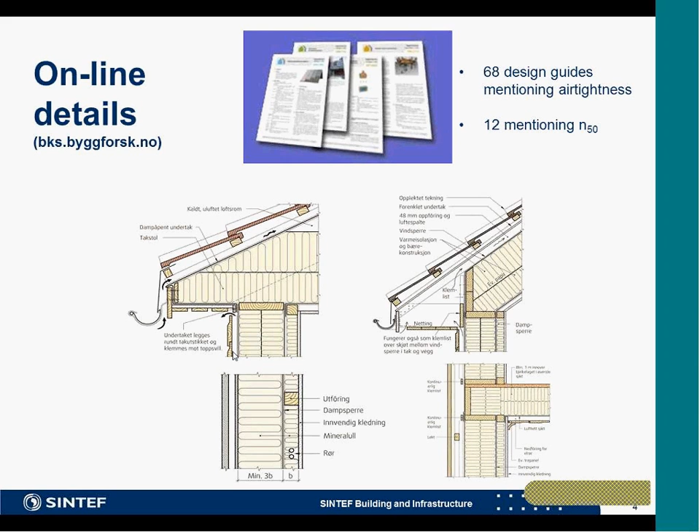And here in this picture you see examples of details that you can find in these guides. These details cover a number of topics in the same guide. They maybe cover thermal, moisture barrier, and wind barrier, all in a holistic way in the same guide. And 12 of them mention the topic of the N50 number, so it's actually quite a large number.

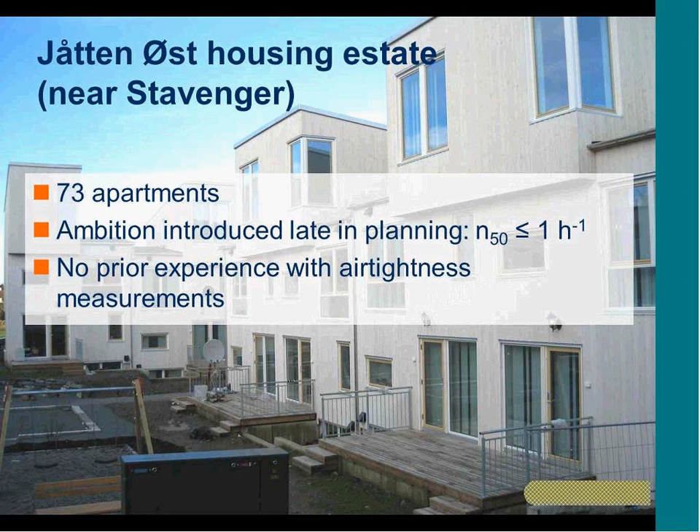Now we're going to take a look at recent projects we have. Just an example of what Torbjørn has been talking about, an example of the situation in Norway. This is a new housing estate on the west coast of Norway, 73 apartments, and quite a late stage in the planning they decided to have quite an ambitious energy level with a leakage number of 1, quite less than the building regulations. And the builders had no prior experience with airtightness measurements or details related to how to minimize leakage.

And what they achieved, this is a graph of the airtightness measurements for each of the individual apartments. At the top of the y-axis is the building regulations from 1997. The present building regulation has 2.5. So the requirement they set for this project was 1, which is quite a bit less. And as you can see, they achieved it for virtually all of the buildings in the end.

The dark blue bars are early airtightness measurements using rather simple equipment. And the last bars, the light blue bars, are measured as built. As Tom said, sometimes the final as-built measurement can be higher because sometimes you puncture the vapor barrier.

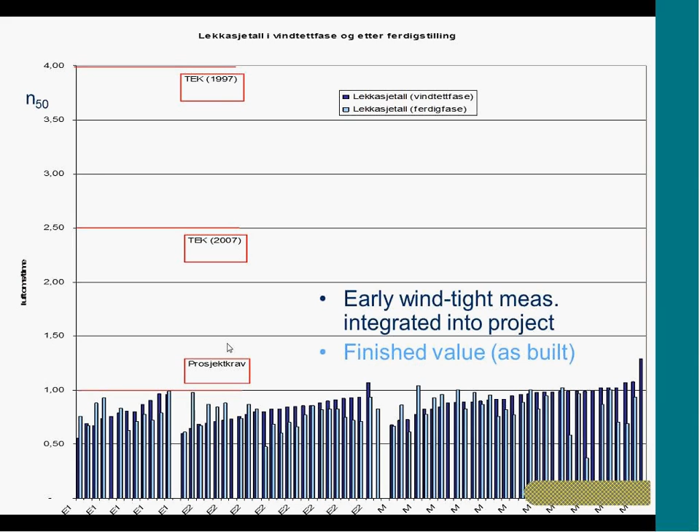Anyway, the conclusions from this were quite clear: even builders that don't have any prior competence about this topic can actually achieve acceptably airtight buildings, and they can do it repeatedly in a building process. And this involves using these early wind-tight measurements. We see that testing is really important. Each individual dwelling has been tested in this case.

If we tested only 10% of the dwellings, I guess that quite a large number of buildings would not really have been. Well, we cannot guarantee that all of the dwellings would have been less than 1. So, using very simple leakage testing equipment to test all the dwellings is a great benefit.

We see that if they had thought at an early stage about planning to achieve good airtightness, they could actually reduce the costs even further, so they wouldn't have to go in and fix the problems they found with leakage points during the early wind-tight stage tests.

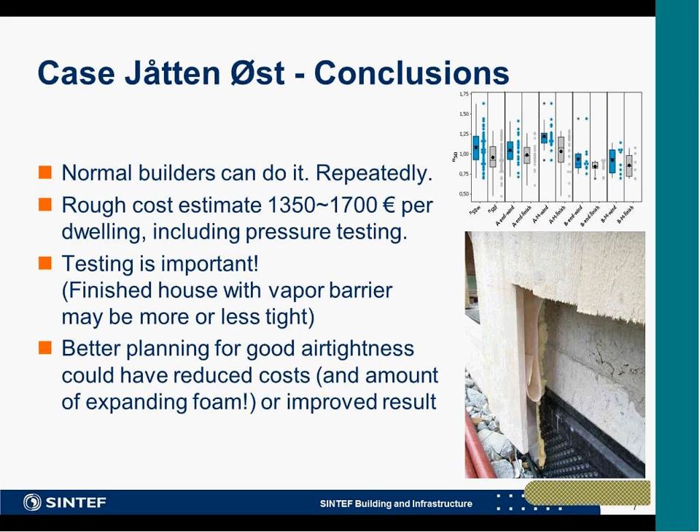There is a certain amount of competition between different contractors in the country, and we have some cases where you can achieve less than 0.1 air changes per hour, which is exceptionally good, we think. But to do this, you have to have good details, testing, and good workmanship.

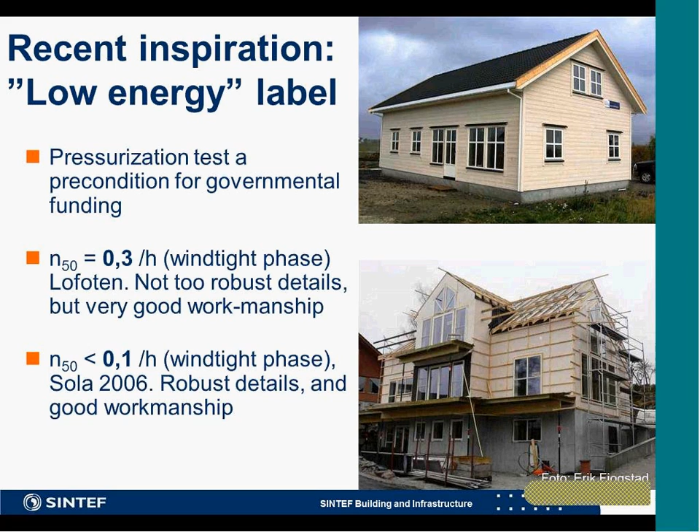Go to actions. When it comes to actions, I would say compliance and having some form of code of practice for contracts are maybe the 2 most important issues I think we have to look at in the future. Now, as to what we have now, well, soon we will have third-party leakage tests, and it's still not really fully decided how exactly this is going to be done. There are a number of questions related to that, so we have to look at them.

It can be tempting to use the simplified test methods, but that's something that we would not necessarily recommend for third-party tests. And would it be possible to maybe reduce costs by testing, say, 10% of the dwellings in a building or in a housing estate? I think that would be very cost-effective, and I hope that's something that we'll be seeing.

And we could see something similar to the approach used in Sweden for testing of duct airtightness. You start off with the contractor obliged to include the cost of testing in their contract. They don't have to test themselves. They can subcontract to a professional who tests, and they first have to test 10% of the duct area. And if that fails, they have to repair that, and then they have to test an additional 10% of the duct area. And if that fails, then they have to test the whole building.

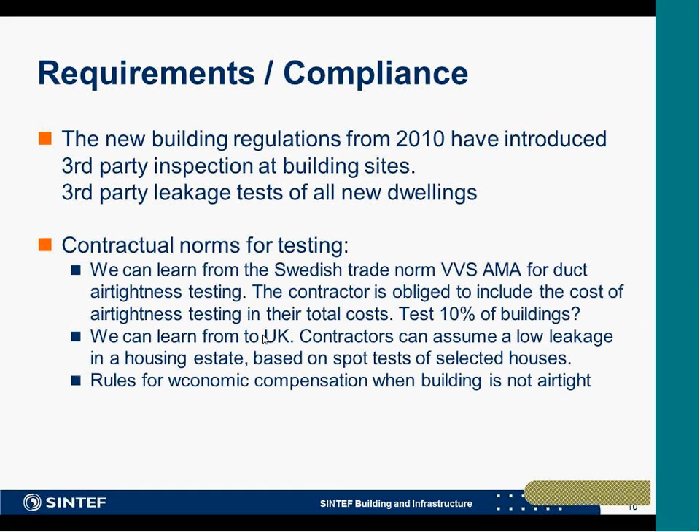When it comes to energy performance calculations and energy labeling, Norway has a very liberal energy labeling scheme where building owners can actually do self-certification. Well, if they're not competent enough, they subcontract it to a so-called professional who can do the energy performance calculation. But homeowners can actually do it themselves. There's very, very simple software on the energy labeling website that anyone should be able to use.

So when it comes to leakage testing, there's really no requirement in this labeling scheme to perform leakage tests, apart from if you want to achieve energy level A, which is equivalent to the passive house standard.

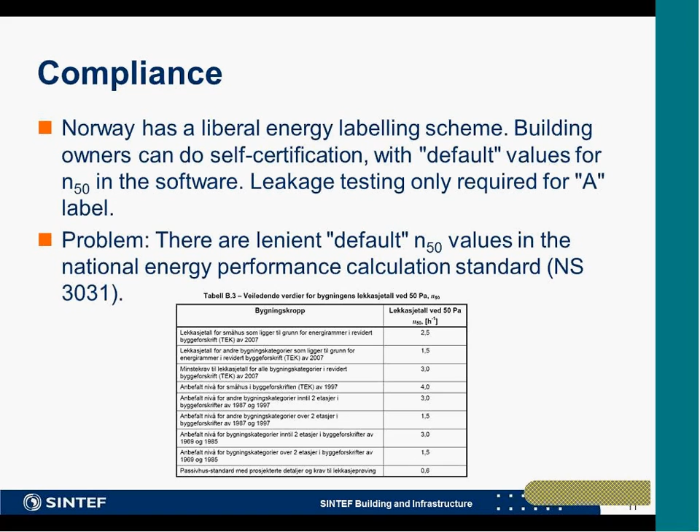Now, there have been a number of issues related to air leakage testing that we need to look at, and we hope to publish some kind of a guidebook in Norway covering these issues. One thing is that the most important thing, the thing that takes the most time, is preparations, and it's important to have a very good simple guide that anyone can understand, maybe illustrated, showing the important steps in preparation, so they actually manage to do it properly.

There are other things that such a guide could cover, such as where should you locate measurement equipment. Say you have a door which would be particularly leaky, then you shouldn't really put the blower door there, because then you wouldn't be measuring the door leakage. And then there's a question of the interpretation of measurements. Now there is ongoing work in ISO related to updating the air measurement standards, and we hope, when that's concluded, to start working on some kind of national guidebook.

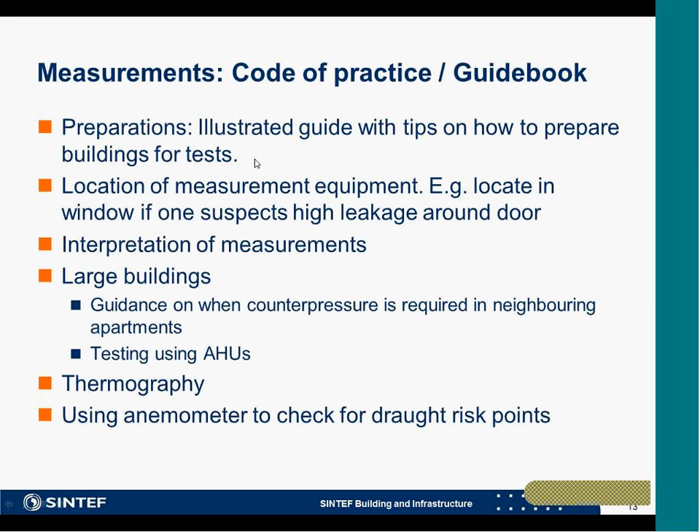When it comes to testing, sometimes it's not possible to test leakage for very large buildings, and we want to follow the experiences that we've seen from other countries in testing leakage in very large buildings with air handling units. And we've had kind of mixed experience. So maybe we would like to include the best experiences in this guidebook and how to do it really properly. Also related is thermography and the practice of using anemometers to check for draft risk points, which I'll just mention now.

This issue of these simplified testing fans that you can buy cheaply, things that are intended for carpenters to use, that tool we found has been an absolutely excellent tool for builders to use during the building process. And we will see continued use of these units, and we hope that other countries can learn from our experience and do the same thing.

When we start doing third-party leakage tests in the near future, they will not, of course, be using this simplified equipment, because it's not really accurate enough for third-party documentation. So third-party tests will still be using blower doors. But there's still a question of can a builder certify themselves, do self-documentation when it comes to energy performance or energy labeling, using these very simple tools. There's still some question we have to solve when it comes to that. How acceptable are these simplified tools for proper documentation?

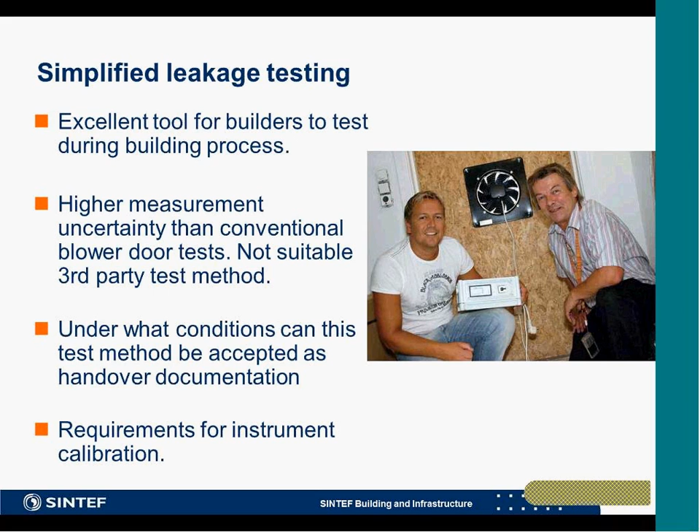We really don't know. Likely they will have a slightly lower status than proper blower doors, but we're not sure what kind of level of status they will have.

Last thing related to measurement is this contentious issue of using anemometers to locate drafts. Let's say you have a building with 50 pascal over or under pressure, and then you locate leaks with an anemometer by placing the anemometer right up to a crack in the facade. One kind of rule of thumb is that if you measure 1 meter per second, then in normal operation, where you maybe have, say, 4 pascal pressure difference over the facade, you'd have a velocity of 0.1 to 0.2 meters per second in the occupied zone, something that causes draft risk.

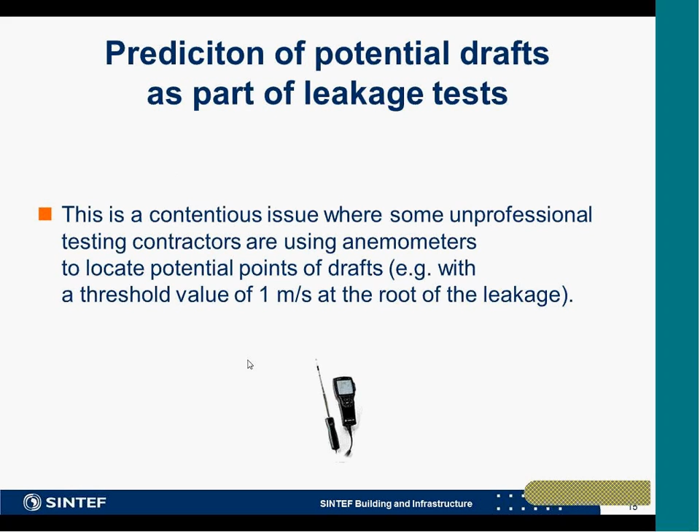So this is a very uncertain way of documenting that the building has a draft risk problem. So find out if this kind of test method can be accepted as good enough documentation at an early stage, or as handover documentation that the contractor has to reduce the leakage problem. We personally think that this method is not good enough. Maybe we have to find a higher threshold level to make sure it's more certain. Maybe more than 1 meter per second, maybe 2 meters per second. We'll see.

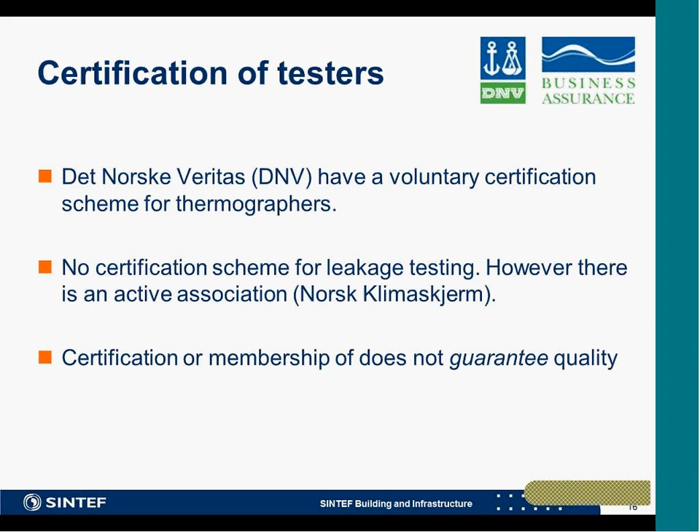When it comes to certification of air leakage testers, there is no certification in Norway. There is a certification scheme for thermographers, and that seems to be functioning well. There is presently no scheme for leak testing. The companies that conduct leakage testing can be voluntary members of an association, Norsk Klimaskjerm, Norwegian facade, a very good forum for leak testers to share experiences and maybe improve their competence. But such certification schemes or association memberships do not guarantee quality. We see that. So these are not really good enough. We have to measure this as well.

When it comes to using air handling units for testing buildings, as Tom mentioned, it's possible to do this in a small scale, also for apartment buildings, but of course use it for commercial buildings. And we hope that we can conduct more experimental work in the future to find better guidance for this that we can include in the measurement guideline that we'd like to publish.

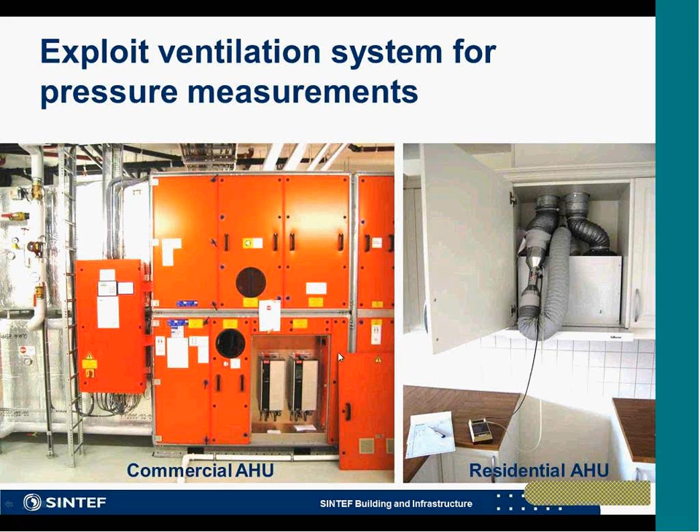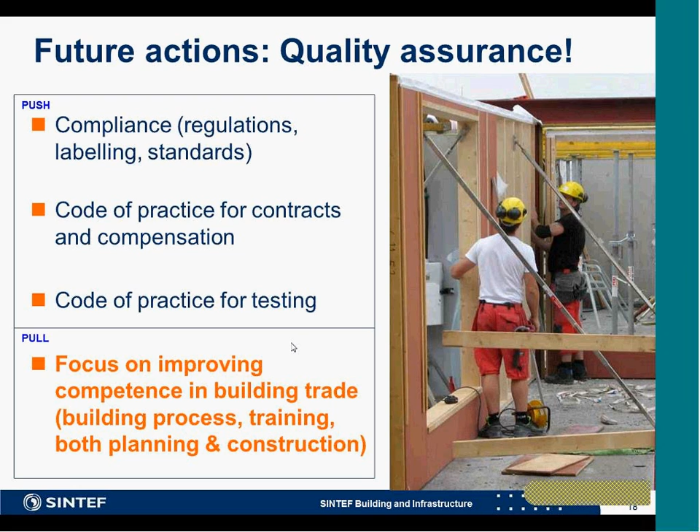The issue of improving competence in the building trade: as Tom said, this early wind tight testing seems to be successful, and it's an ongoing process. It's called training by doing. We have things in the pipeline. We've been working on better solutions for critical details for passive house buildings. This is a publication that should maybe come out this year. Also, a similar thing for concrete buildings related to passive house constructions.

There are a number of critical details that we know from experience are a big problem in buildings. For example, something that's becoming increasingly popular is using prefabricated bathroom modules. And these are notorious when it comes to leakage. Something we know is a problem and has to be solved somehow.